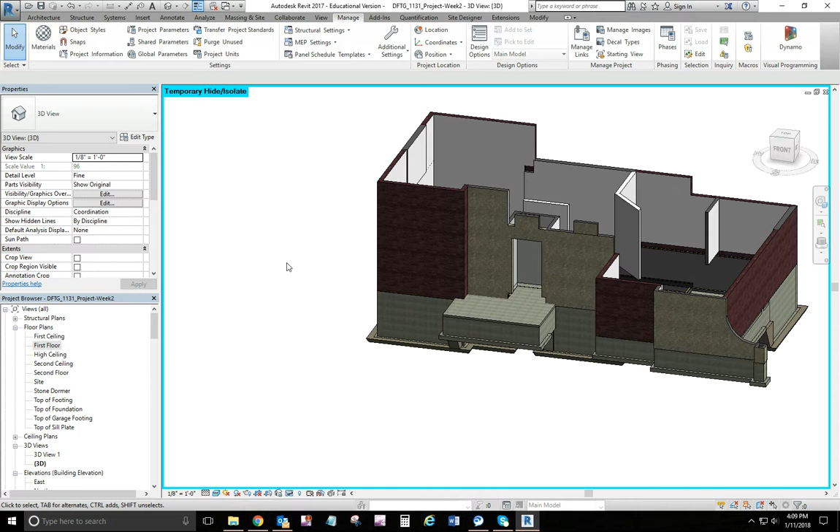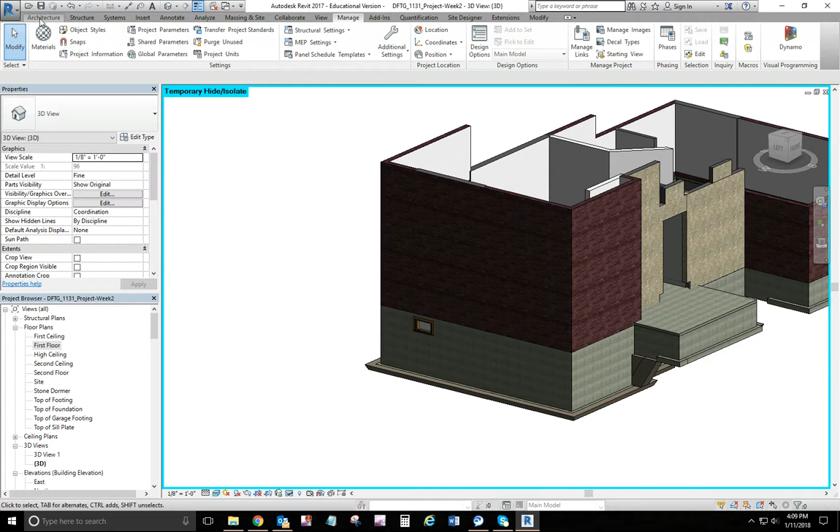Okay, back to a previous video where we adjusted the wall levels on the inside, and it created some voids on the outside of the walls here. So if that is happening to you, you can do it here in 3D, or you can go back to the 2D plan. But what you'll do is use the wall joins tool and then pick that particular wall. And it'd probably be easier to see it if you've got both screens open, your 3D view and your plan view of the first floor.

And I'm finding that the miter option works best, and you cycle through previous or next to get a good miter. And I think that will clean up those things.

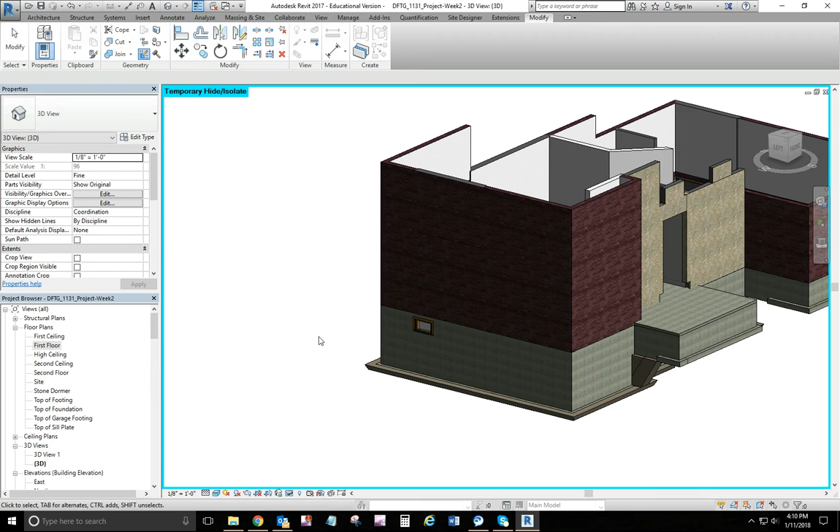Okay, now sill plate. I have turned off the interior walls. What we're creating right here is our 2x4 sill plate that extends 1/2 of an inch over the concrete. Like I said, a lot of the recommendations that I found was to create a wall type and do that. Well, I tried it several times, and I could not get the joins, the corners to join together properly.

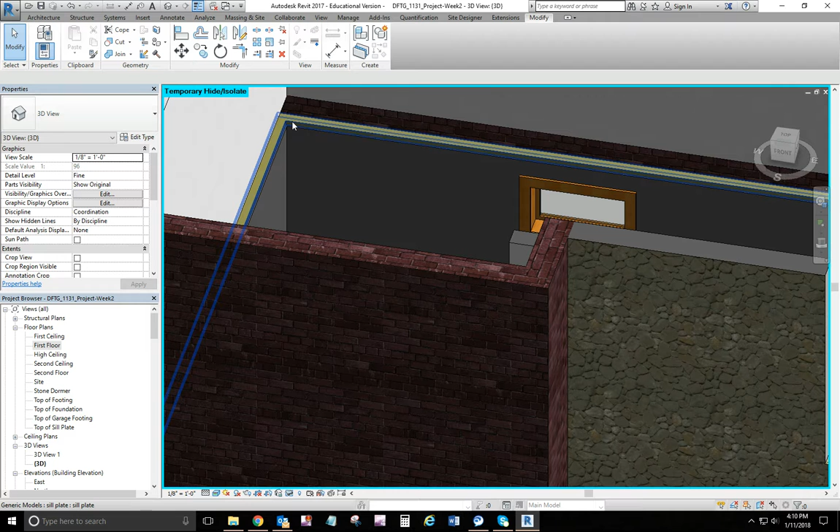If you want to try it that way, be my guest. Go for it. Give it a try. See what happens with your project. But that was the recommended way, because most buildings have a consistent wall around the exterior of the building. But here we've got 2x4 studs, 2x6 studs, brick, stone. We got lots of stuff going on. So I couldn't get it to work. So here's what I did.

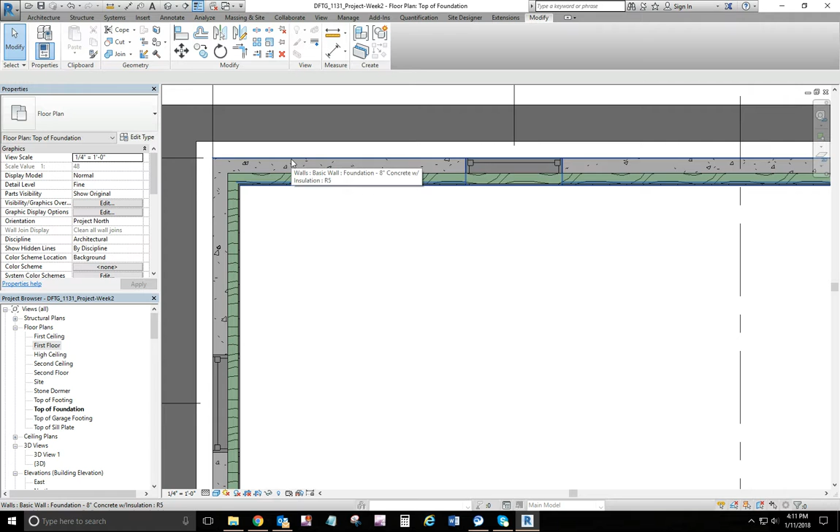I went to my top of foundation level, and I adjusted my view range so that I could pick up the wall itself and the insulation. Okay. And then what I did is I did a sweep. So on architecture here, you go component, model in place. I did it as a generic model. You can name it. Okay. All right.

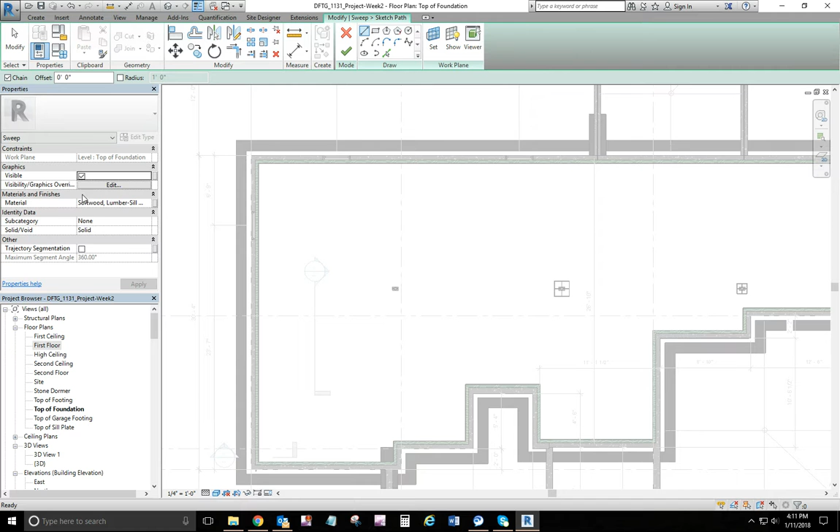What I did here is I chose sweep, and I did not do pick path. I actually did sketch path, and I set a 1/2 of an inch offset. Okay. And while you're here, go ahead into your lumber and your materials. I duplicated softwood lumber, made a new one, and I gave it kind of a green color.

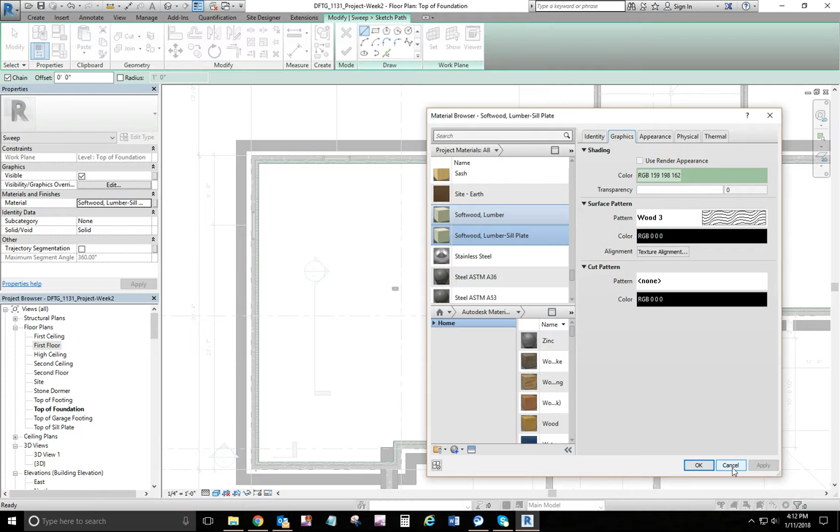You don't have to do a pattern. Well, you could do the surface pattern so you could see it better. But I applied a green color to both appearance and graphics. That will help you to see it as you're working on it. Okay. So you do your sketch, and we're doing a 1/2 inch offset.

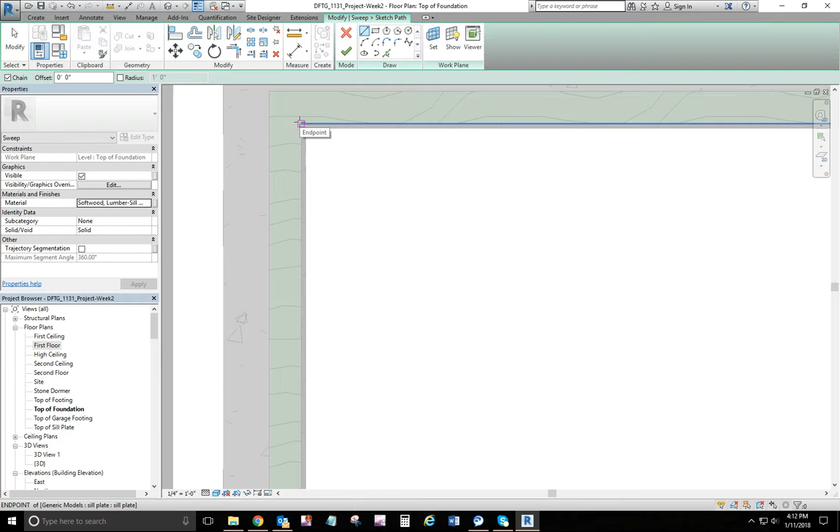Pick the edge of the concrete. I would do that because that's the core, and work your way all the way around the building. And then what you're going to find is some of them may not snap exactly right, so you may have to go in and edit the path. And I'm going to cancel out of this.

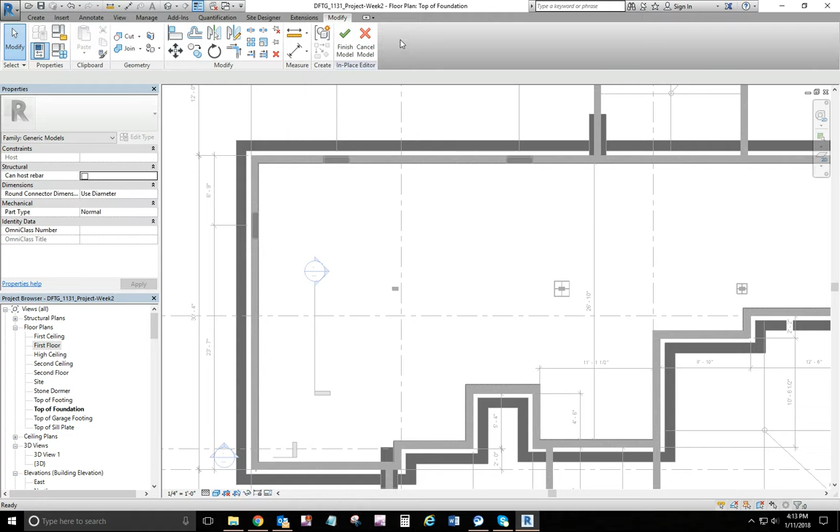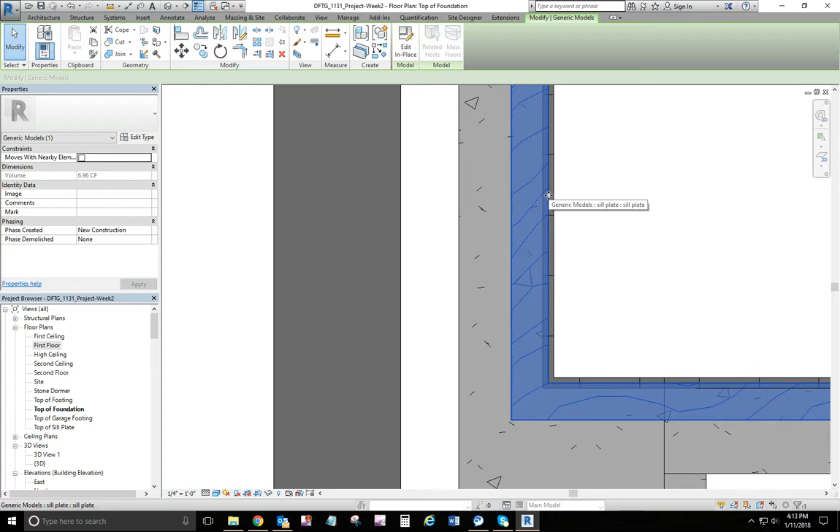Well, I don't know what happened to my, anyway. Okay, so you're going to do the path all the way around. And like I said, some of the lines may not work out to be exactly in the middle, so you got to go back to each wall segment and check and make sure that the edge of your path, which is this edge right here, is in the center of that insulation. And you want to connect that all the way around.

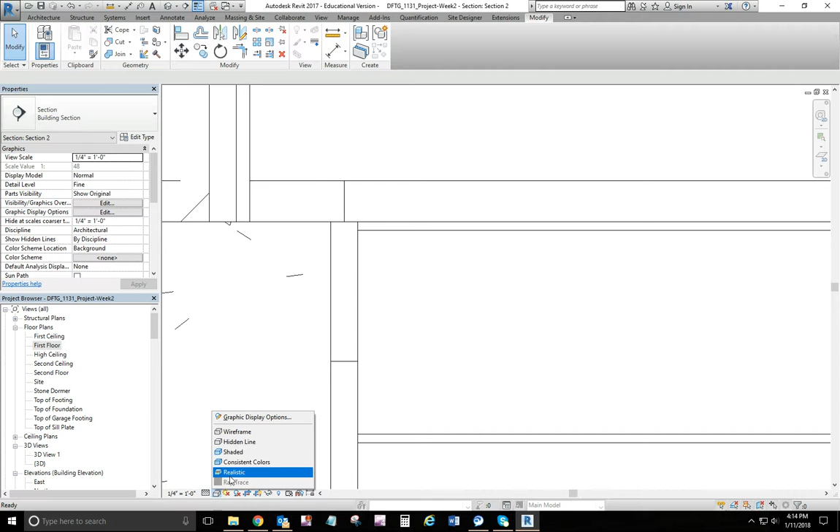And then you'll do a profile sketch in one of the section views. I did it in this one here, I think, I don't remember. But you'll do a section view right here. Let me go to color. And it's an inch and a half tall, 3.5 inches wide. Okay. And then you finish that out and it should create that sweep all the way around for you. Okay. So that gets the sill plate.

Next, we're going to look at how to do the 2x10 floor joist and the flooring system.